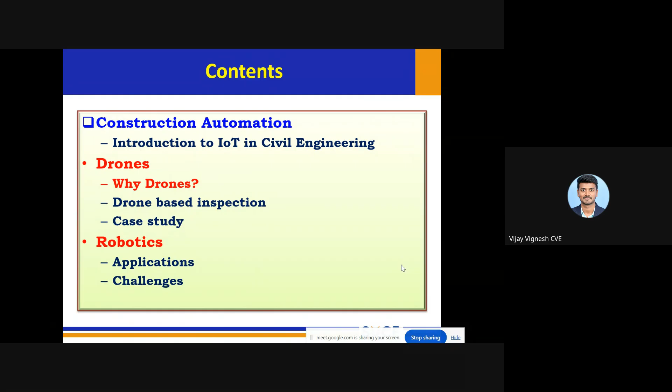When I say automation, first we need to know what is automation. Construction automation is the application of robotic systems, unmanned aerial vehicles (drones), intelligent machineries, sensor networks, and software tools to perform or assist tasks in the design, planning, fabrication, assembly, inspection, and operation phases of projects. So it's all put together.

Whether we use robotics or drones, whatever machinery we use makes the task simpler or leads to making it more effective. That's why we use automation, so that everything is automated and we won't have much human interference in building projects.

It can be any stage of the project - design, planning, fabrication, inspection, or operation. If it is automated, there will be much less involvement of manpower; manual labor will be significantly reduced. That's the main purpose of moving towards automation - to reduce manual labor and at the same time improve accuracy.

Accuracy means when I use robotics or machineries instead of manpower, the accuracy in performing the task will be higher - more accurate, whether it's brickwork, plastering, or lifting and transporting material. Anything done with the help of machinery will have more accuracy.

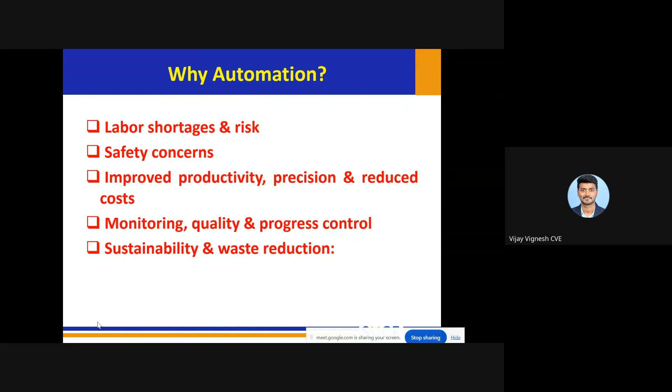The main reason is that, unlike other industries, in construction we are performing a unique task. The laborers are not performing the same task every day, because in the manufacturing industry, labor performs a task which is repetitive in nature - the same task day 1, day 2, day 3, day 4, every day. That's why we see that kind of trend there. But in construction, a mason performing a task today will not be performing the same task tomorrow, and day after tomorrow will perform some other task. Due to this reason, productivity keeps decreasing here.

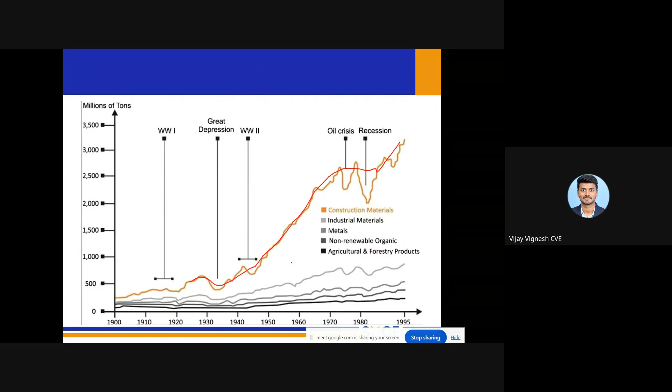So when I say wasted, it means it is not being used properly in our construction site. What is the solution? The ultimate solution would be to move towards automation. So when I say automation, the first thing we need to know is Internet of Things, IoT. IoT is nothing but a network of interconnected devices or objects embedded with sensors, software, and other technologies that enable them to collect, exchange, and act on data.

So when I say act on data, it means it can analyze on its own. It can analyze or evaluate the data. So whatever data it collects, it will exchange between the medium, and it will analyze, and it will give the output. So that is the main terminology for IoT.

So IoT definition just goes beyond smart gadgets. The examples would be like a smartphone, or computers, or a wide range of devices that we use in our household appliances, or any medical devices or vehicles.

Even today we are using ADAS in our cars, automatic driving system, something like that. It will automatically detect what objects are there, or what kind of vehicle is moving towards us, and it will automatically stop the vehicle. So that is one example we can see when I talk about IoT.

So for IoT, the main advantage is real-time data is being shared, and it will be communicated from one device to another device. These objects will talk to each other, meaning whatever device we incorporate in our system, these devices will talk to each other, and it will make informed decisions based on the data they collect, after analyzing it.

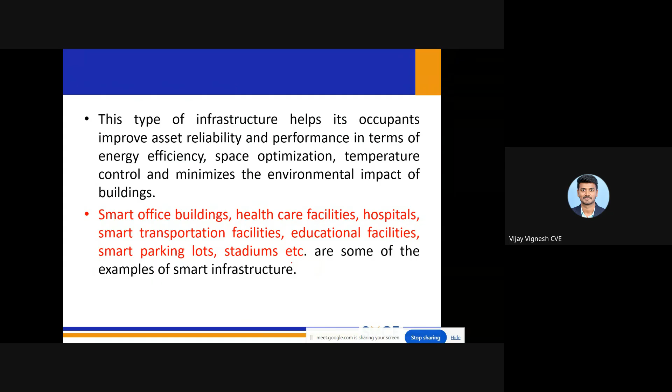So let me move on to the main aspect of this lecture, that is drones. The historical background and equipment - how we were using drones in the early stages.

In the past, there is a long history dating back to 1849, where soldiers were using unmanned balloons filled with explosives during the Austro-Italian War to attack Venice - a war between Austria and Italy. During the war they used large unmanned balloons to drop explosives from the night. That is the first instance where humans used drones.

In 1849. However, large scale use of drones began during World War One, and for a period after that, we were using drones only for the purpose of war and other related things.

In 1916, Britain developed the first aircraft drone, called the Ruston Proctor Aerial Target, followed in 1918 by the US Kettering Bug, an experimental aerial system with a flying bomb. These are things we need to know, because of the purpose for which drones came into place.

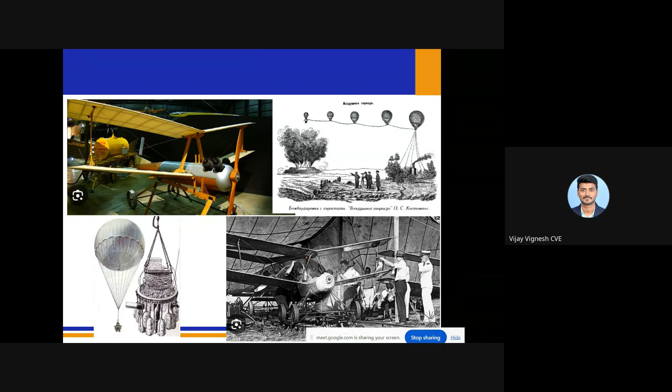The modern drone era began in the 1960s, with both the United States and the Soviet Union developing drones primarily for military purposes. While military applications have driven drone research for many years, drones have been used in today's various fields, for example agricultural, environmental monitoring, public safety, security, media, entertainment, etc. The use of drones in civil engineering, especially inspection, is significantly increasing.

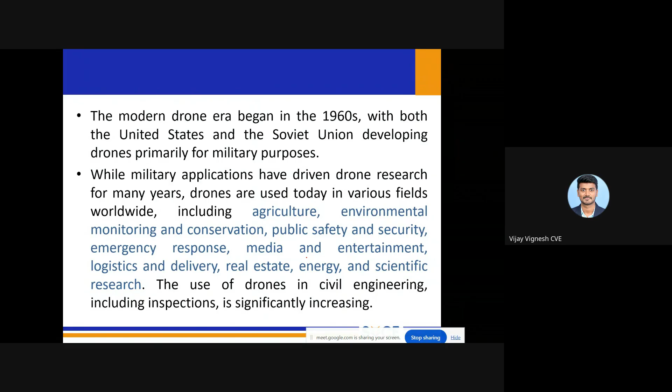This is the part where I'm going to describe in detail. There will be a number of applications, but in civil engineering, in modern construction projects, drones have been used predominantly for inspections - for any structural inspection or bridge inspections.

The existing problem is that traditional approaches based on contact sensing have some drawbacks. Usually, the traditional way is that humans go to the bridge or whatever structure we are going to inspect, collect the data, and analyze it there. It takes more time to analyze and more time to get the output.

So that is the main traditional approach we were doing in the early days. The problem here is the cost. The cost will be more. When I don't use drones and instead use manpower to collect the data, you will need a lot of manpower and you will be installing many other structures to collect all the data. So the cost of intensive instrumentation for the bridge can be very high.

When I say bridge monitoring, it is nothing but structural health monitoring, to detect any damages in the bridges. So those things will be collected using drones. Once the contact-type SHM is installed on the bridge, the components are often not reusable for other structures, and they are prone to fault. During extreme conditions, when critical structural health information is most needed, it is prone to giving faulty data.

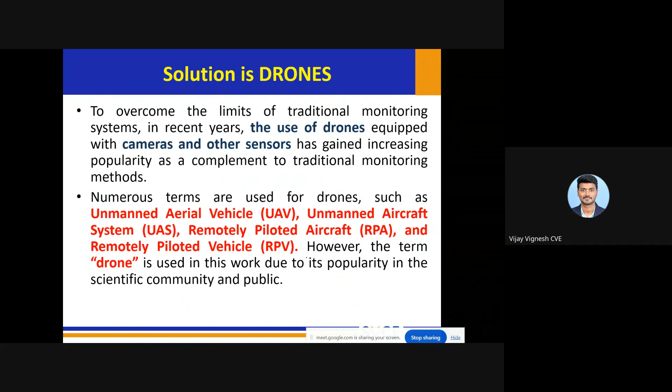Unmanned vehicles means vehicles without onboard operators. When I say unmanned, it means there won't be any man, there won't be any operator to operate it. It will be operated remotely from some other place. These vehicles are commonly controlled autonomously using onboard sensors and control systems.

Drone-based inspection offers several advantages. I'm just going to list a few. They provide a versatile and efficient means of data collection and monitoring, and perform detailed inspection, detect superficial damage, and even assess dynamic parameters.

When I say bridge inspection, it means structural health monitoring. That means we need to collect all the data from the bridge—we need to detect all the damages or dynamic parameters, what kind of vibration is going on, what the total moving load is. All that data should be gathered in a single platform.

So that data will be gathered in the drone, and the drone will process the data and transfer it to some other place in a cloud, where software will process it and we will get the output. Large amounts of information can be obtained from drone sensors, including high quality images and videos, which can be stored on memory cards inside the drone and later processed and delivered to the ground station deployed in the area of interest. This means everything we collect will be transferred to some other place.

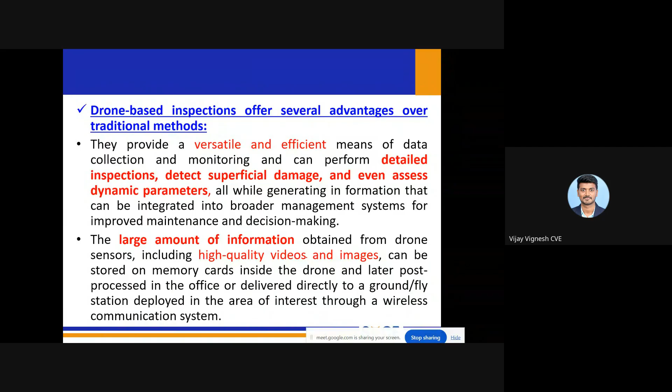That other place can be a deploy station where people will be present to analyze the data. Whatever data we need, we can get it from the deploy station. The main aspect is high quality images and videos—these are the things we are going to collect. In drones, we are just collecting images and videos; we capture those things, and after capturing, we analyze them.

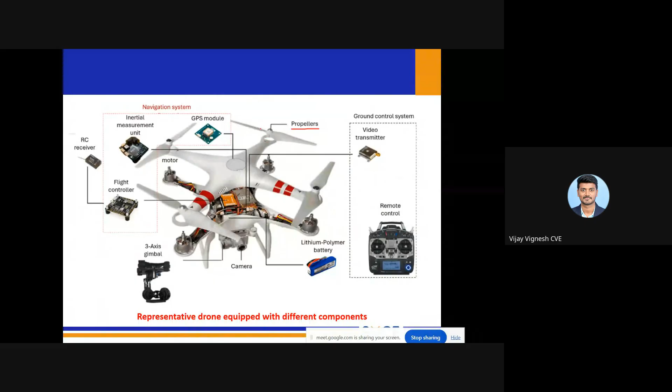The propulsion system consists of motors and propellers, with four or more motors providing the necessary thrust to lift and maneuver by varying their speeds, and propellers that generate lift and thrust, significantly influencing flight performance and efficiency. These four propellers play a vital role in lifting the drone, providing necessary thrust and adjusting speed, generating thrust which affects flight performance and efficiency.

So why am I saying all this? Because we cannot simply fly the drone and get the data—there are a lot of factors we need to consider. That is why I'm explaining all this. The communication system is the exchange of communication between the drone and the ground station; that is one component we have.

The navigation system includes the flight control unit, which processes sensor data, and we use GNSS, the global navigation satellite system, for locating data, enabling autonomous flight path and position hold. This means we need to check whether there is any obstacle in the environment. If there is any obstacle, we cannot simply fly the drone in that region—we need to see whether the obstacle will endanger the drone, or whether there is a possibility of changing the flight path.

The power system means the battery—the drone has to get its power from the battery, right? So the battery, power distribution board, and electronic speed controllers come under the power system. It runs on a battery; that is the main aspect we need to know.

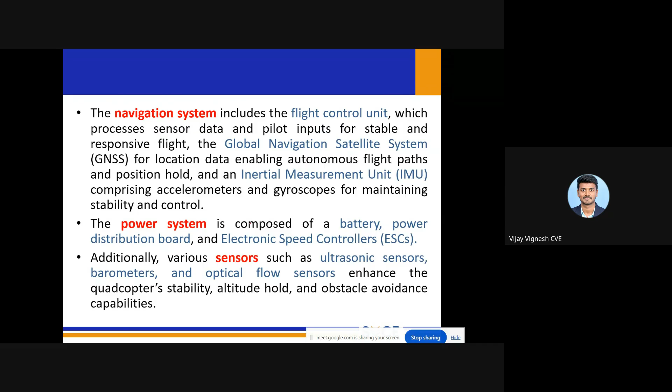Additionally, various sensors are used: barometers, optical flow sensors, ultrasonic sensors. These sensors collect the data. We need to take some data, right? Through these sensors, we collect and transfer the data. And some key devices we need to use in our drone are RGB image camera devices.

It is very much essential for drones to capture real digital images or videos, because it will capture the images through some resolution. There are some advanced models such as RGB-D sensors, which will enhance the capability by recording pixel depth and other information, which will support the 3D reconstruction of the infrastructure.

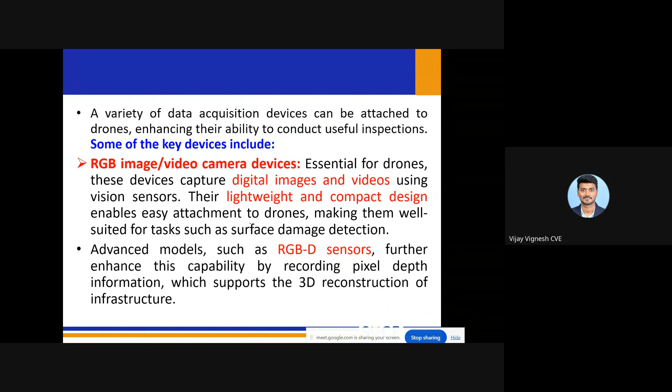The main purpose why we use this kind of RGB camera device is we will capture the images, and it will reconstruct that image in a 3D form. That is why we are capturing this kind of data through these devices.

So we have another device, LiDAR, that is light detection and ranging sensor. It will use laser pulse to measure the distance from single points with exceptional speed, often scanning thousands to millions of points per second. This rapid data collection allows the creation of detailed 3D point clouds.

When I say bridge monitoring, the main purpose is to find out whether there is any cracks or delamination, or any structural fault in our bridge structures. For this we can use LiDAR sensor, which will collect so much information and create 3D point clouds that reveal surface level cracks or delamination in our bridge.

Thermal sensor is used to detect any temperature surface variation. If there is any water leakage or insulation problems you want to find, we can use this kind of thermal sensor.

You can see these different sensors that we incorporate in our drones: camera, LiDAR sensor, and infrared sensor. NIR means near infrared sensor. It is costly and less commonly used, and it is a combination of both infrared and RGB sensor.

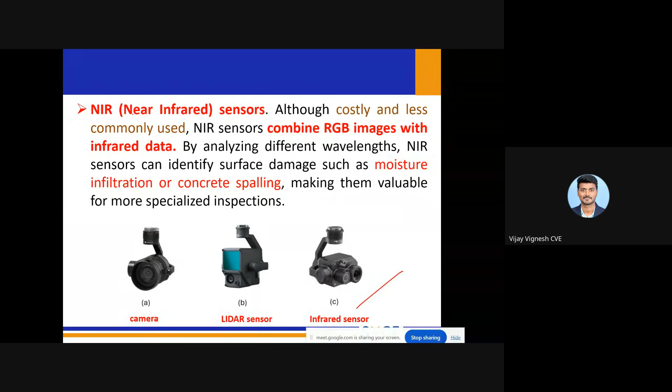Most probably when I want to find out whether there is any surface damage like moisture infiltration or surface level concrete spalling, we can use NIR sensor. So we can do many specialized inspections in our bridge structures. These are some important points we need to know while incorporating drones in our modern construction projects.

For example, weight of the drone - meaning self weight of the drone - plays a vital role which impacts the flight autonomy, because heavier drones can fly for less time. If the weight of the drone is increased, then there will be lesser time for the drone to capture the image. So simultaneously, lighter drones can extend the flight times.

If the drone is lighter, then we can use the drone for longer duration. The reason is it will reduce the risk of overheating issues also.

But the problem here is heavier drones can perform better in wind conditions. If there is heavy wind at a height of more than 50 or 100 meters, the effect of wind will be there. Under heavy wind or air pressure, heavier drones will give better performance than lighter drones. Lighter drones have some issues here - due to wind effect, they cannot give better performance.

The drones have to withstand at least a wind speed of 10 meters per second to minimize the vibration and sudden movement caused by air turbulence. There will be turbulence and vibration, and the drone needs at least certain capability to withstand it - that is what I'm saying, 10 meters per second.

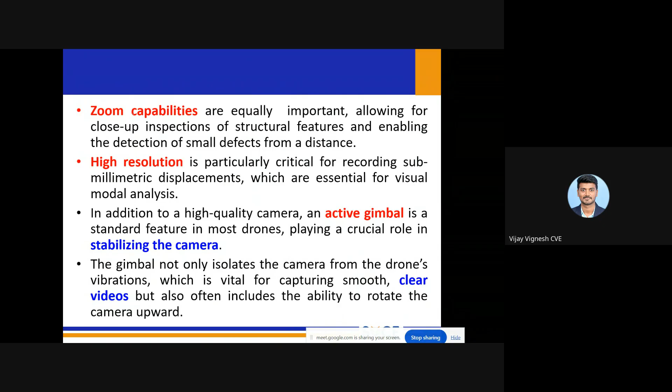That means that whenever there is any vibration or effect of wind, the gimbal will stabilize the camera and make sure it captures images properly. So the gimbal not only isolates the camera from the drone's vibration, but is also vital for capturing smooth, clear videos.

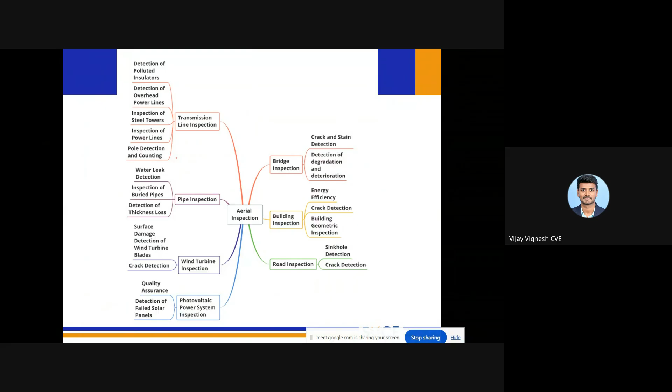But in this lecture, I'm going to concentrate more on bridge inspection - how bridge inspection can be carried out. The case study is inspection of bridges.

The main objective of doing this inspection is to find whether there is any structural fault or issue in our bridge structures - any cracks or surface level damages. So we need to find out the critical issue of the bridge, the current status of the bridge with respect to service.

For example, a visual inspection of bridge structure is to monitor the bridge status and ensure the ongoing serviceability of the structure - whether it is functioning properly or not. If not, then what is the problem behind it? Those things we need to find out using the drone.

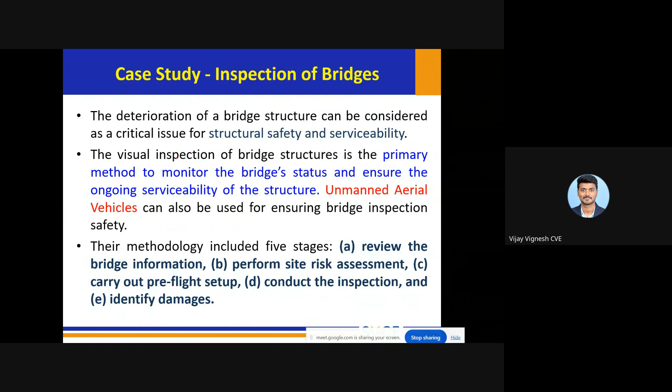So unmanned aerial vehicles can be used for ensuring bridge inspection safety. The drone will go into the bridge inspection place where it needs to be inspected, and it will collect all the data - images, videos - and send the data to some deployed station, and from there we will analyze and get the data. This is for inspection safety.

What are the different criteria? We go through different stages: pre-inspection, inspection, and post-inspection. In pre-inspection, before the actual inspection, we identify access points, areas like cracks, bridge components, and hazardous areas.

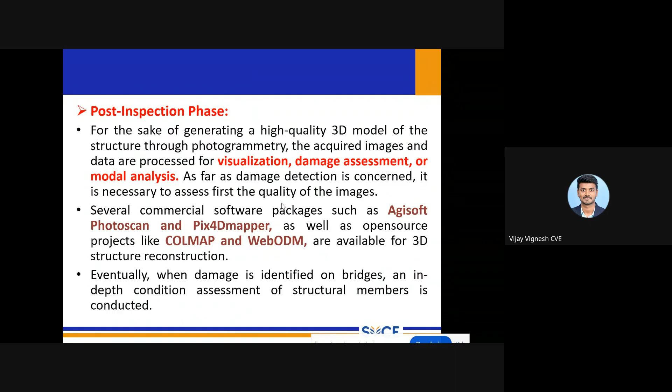Whatever image we capture, we can input into this software, and it will analyze and produce a 3D structure reconstruction, showing whether there is any defect, delamination, or surface level fault. Those things will be mapped in the software. Eventually, when damage is identified on the bridge, an in-depth condition assessment of the structural member is conducted.

Path planning and optimization is very important because there are few criteria we need to consider while doing flight operations, meaning flight duration of drones. The first thing is to identify the point of interest, the point at which it's going to capture the data. We need to plan an efficient traversal route for the drone to minimize overall flight time while maximizing battery life, spending lesser time while capturing more images.

When planning the flight path, several criteria must be addressed: ensuring collision-free flight, meaning it should not collide with objects or interfere with obstacles; achieving full coverage of the structure; obtaining images of sufficient quality; feature detection; minimizing the number of images; and devising an efficient flight route.

The method we are going to adopt here is the STIP method, meaning horizontal steps we create and capture using our flight path. For example, in a pier or a bridge, you can see a lot of lines drawn, each leading to a point called the point of interest. This means the drone will capture each and every point located here, planned so the drone captures images in a circular form. This method is called the STIP method.

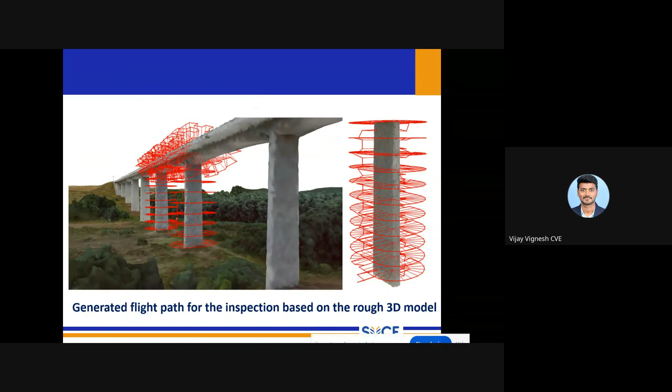These horizontal steps are more effective, particularly when combined with low flight speed. In this method, we deploy the flight at a lower speed, which means it captures data with high accuracy.

Another important factor is the optimal distance between the drone and the target. We need to make sure an optimal distance is maintained, usually around 1 meter or 1.5 meters depending on the situation. Under poor lighting conditions, 0.3 meter is required; under good lighting conditions, 1.1 meter is very much required.

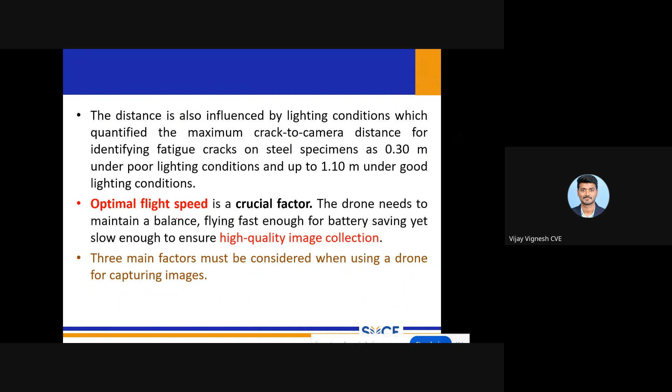Speed becomes important because it affects the balance of the drone. If it flies fast, it won't capture high quality images; only when flying slow at a lesser speed will it capture high quality images. Timing of the flight is also crucial because shadow, daylight, or solar radiation cause overexposure during image acquisition, affecting the output data. For example, collecting data at night results in lesser resolution and less detail in images. There is a standard time to collect data—for instance, in the evening there is lesser interference from solar radiation and shadow occlusion.

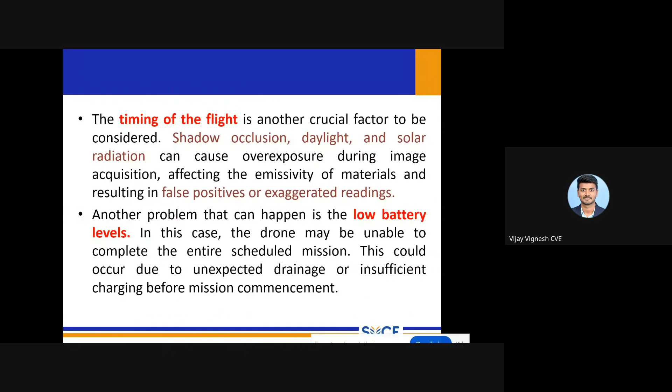Another main issue in drone inspection is low battery. Drones operate under a power or external battery source, so a drone will be unable to complete the entire mission or scheduled flight path if there is any battery issue, which could lead to unexpected drainage or insufficient charging before mission commencement. To overcome this, we need a specific threshold where battery level is continuously monitored during the mission. Whenever it reaches that threshold, the drone initiates return to its home point, the deploy station, so we must continuously monitor battery voltage and capacity.

Another aspect here is the Internet of Drones. This means we have different drones put together, interconnected, communicating with one another, acting as a single network. This is called the Internet of Drones.

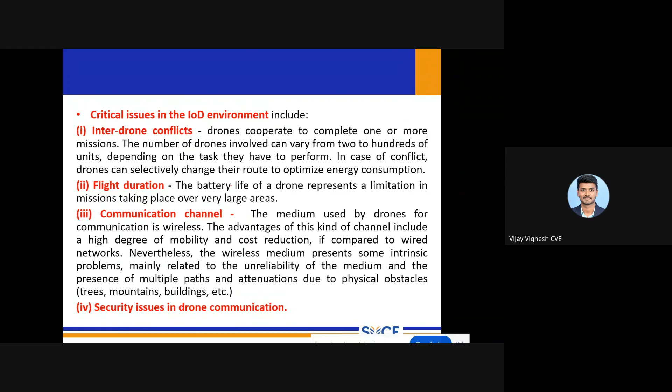Nowadays in rural areas we are still using wired medium, wired networks are being used. So mobility will be low, and security issues will be there. It can easily be hacked by some other person if they can access the data. So that is one issue we can have in this part.

How it can be employed in urban scenarios: it can be used for real-time monitoring like air quality, noise and rubbish detection. Also it can be adopted for traffic improvement, if there is any congestion, detection of accidents, road conditions, etc. Using this kind of Internet of Drones, we can identify those things and it can be deployed in urban settings.

Challenges: vibration becomes a more important issue. Vibration caused by external sources, vibration caused by maneuvers or aerodynamic sources like wind, stabilization system, or by the engine itself. Drones have propellers which rotate at some speed, and due to this propeller, vibration will come from the propeller itself, affecting flight performance.

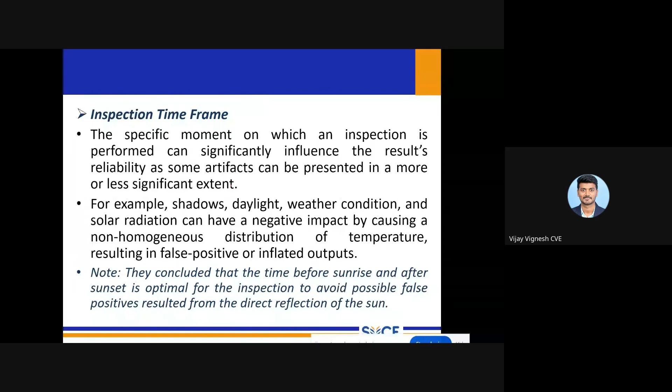These are things we need to check before going for drone-based inspection: the inspection time frame, when and where we are going, for example during shadow, daylight, or solar radiation, and during which time, for example sunset or sunrise. The solar radiation will have a negative impact on the images and give false positive output, so we need to avoid those things because of direct reflection of the sun.

If you collect data from that reflection and analyze it, you get false or poor data. The distance between the drone and the specimen is also important. Usually we need about 1 meter distance from the surface to ensure proper visibility for detection of small scale cracks in concrete structures.

Reflection is another consideration when doing drone-based inspection - we need to see whether there is an effect of reflection from surrounding objects on our surface. Due to surrounding objects' reflection, the drone will collect data with some sort of abnormalities, meaning there will be false data. This is a standard practice we follow whenever recording during drone-based inspection.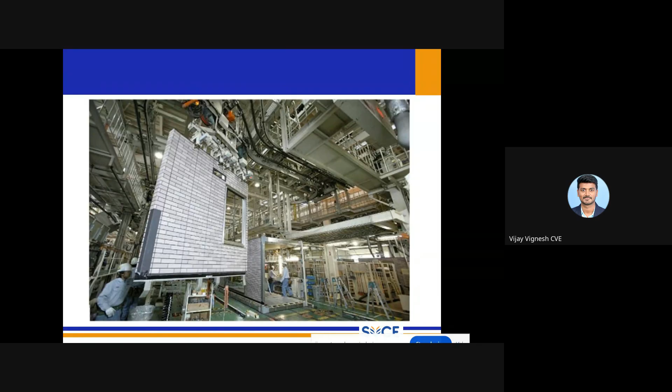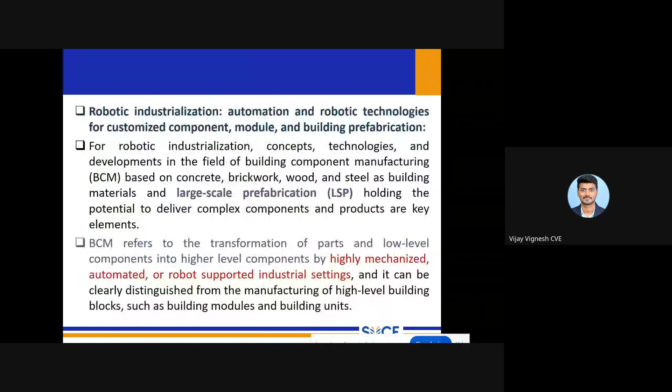Robot-oriented industrialization means much more effective large-scale prefabrication. For example, you can see here a whole building component has been constructed in our industry, everything done by the robot itself. Not just a single brick, I'm talking about the full wall - all the walls, doors, windows, everything fixed, and the whole building unit assembled in our closed environment, industry. It's being done by the robot. That's what I mean by robotic industrialization, customized to our user requirements, prefabricated but using robotics. So we are using large-scale prefabrication using robotic systems - highly mechanized, automated, and robot-supported industrial settings.

The next part where we can use robots is construction robots, elementary technologies, and single-task construction robots, where we use certain robots to execute specific construction tasks in a repetitive manner. For example, if we need to paint a building, we can use a robot specialized for painting. Suppose we're doing brickwork, then we can use a robot that can do brickwork. So for a specific, repetitive task, we can adopt such methods.

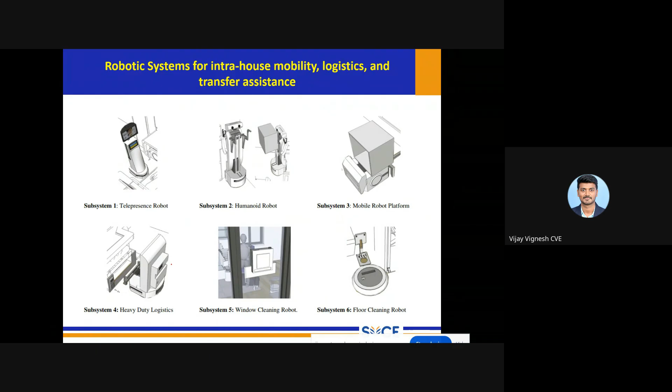These are some examples we can see: robotic systems for intra-house mobility and logistics. These are things we come across in day-to-day life, like heavy-duty logistics robots, floor cleaning robots, robot platforms, and telepresence robots - some examples we see at the airport. Window cleaning robots are also there, for high-rise buildings where we can deploy this kind of robot.

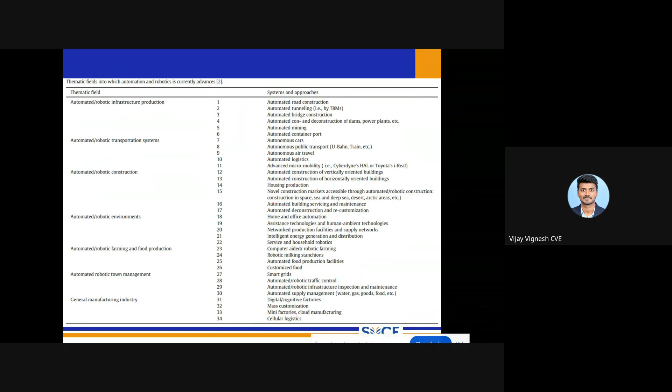These are different thematic fields into which automation and robotics currently advances - different areas where it's being used and is under research. For example, automated robotic environments, intelligent energy distribution, home and office automation, housing production, and automated mining. So automation has been incorporated into different sectors.

So in this robotics section, I'm going to explain more about a particular robot called the mobile construction robot. But before that, I'm going to explain what mobile manipulators are.

Mobile manipulators means a mechanical arm mounted on the skeleton of a mobile robot. It's just an arm mounted on the robot's skeleton, which enables the end effector to achieve desired motions through coordinated movements of both the skeletal base and the mechanical arm.

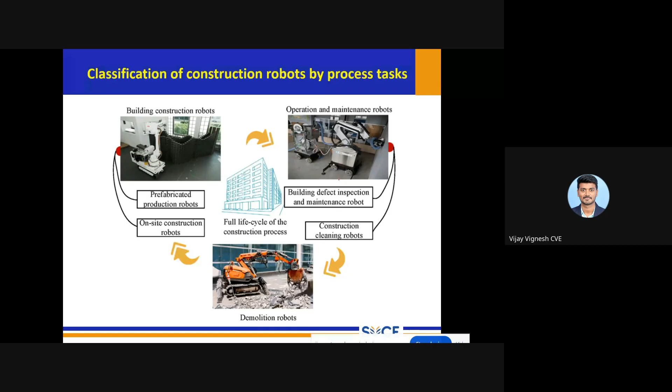Classification of robots by process task: for a building's full life cycle, we can deploy robots starting from construction, using prefabrication production robots or on-site robots. In demolition, we can use demolition robots to demolish building components. In operation and maintenance, we can have maintenance and cleaning robots. So robots are not only used for construction activity, but also for demolition, construction, operation, and maintenance, in every phase of the project.

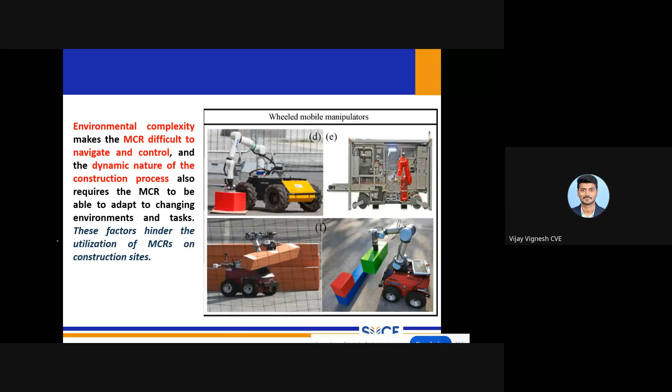The main issue here is environmental complexity, which makes MCR more difficult to navigate and control. Navigation becomes harder with environmental complexity, like any hindrance around the robot, since it's difficult to detect such hindrances. If there is any hindrance, we cannot navigate properly on our projects.

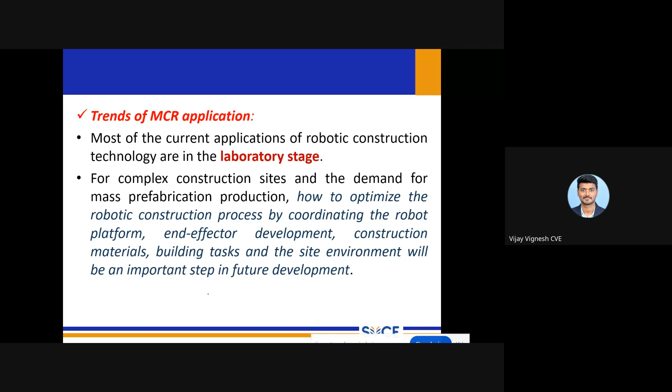In most cases, MCR applications are still at the laboratory stage, but in the future, they can be incorporated into prefabrication production or construction projects.

Okay, so this is how robots can be interacted in our building projects. We can simply say robots in future will completely eliminate the manpower, if at all we install or deploy it properly at our site.

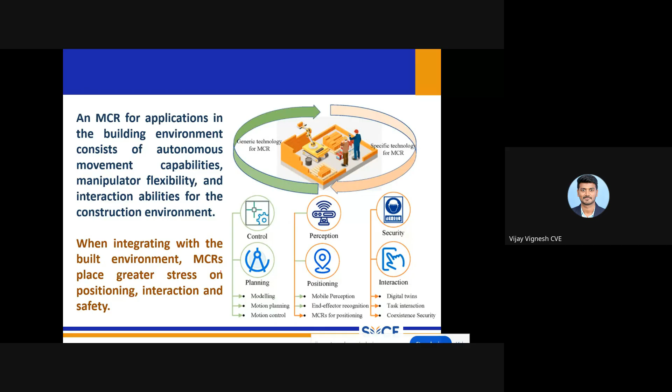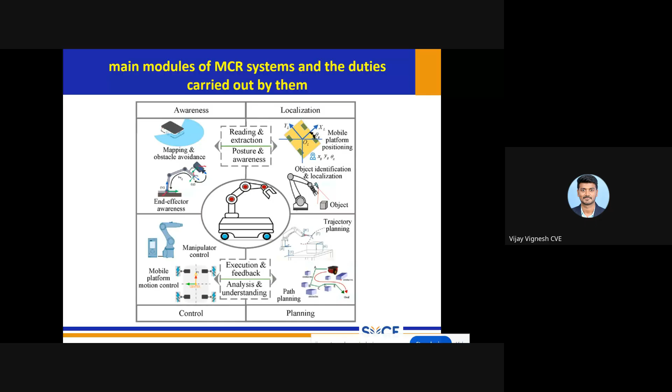Manipulator control means this part - control means motion control, how it's going to navigate in a project. Path planning means how it's going to plan the trajectory, for example how it's going to move from one point to another point.

Motion planning becomes more important in case of a construction site, because sound planning is very much required - every day we cannot say the same process will be carried out, the same activity will be carried out. Sometimes we have beam construction, beam concreting, the next day concrete, some other plastering work - so we have a dynamic nature of site, changing from day to day. So motion planning becomes more essential because it has to work in a complex scenario.

Environmental perception means how it's going to collect all the environmental data, like surrounding data using sensors such as lidar, camera, sonar, or GPS system. It will collect the data, map it, and construct its own map of the unknown environment. That process is called SLAM, simultaneous localization and mapping.

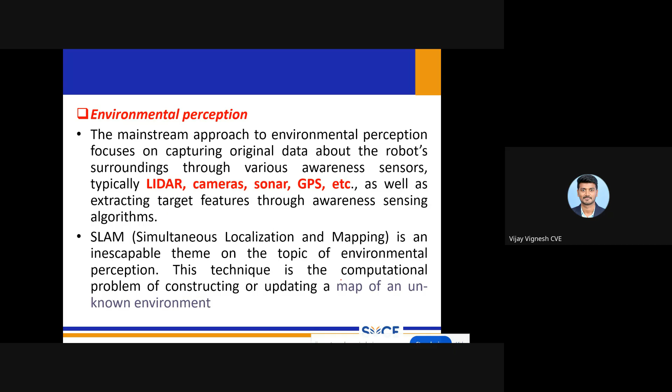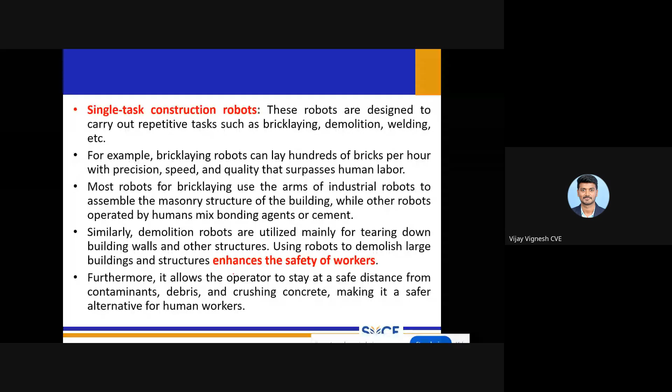Robot applications in construction projects - different applications are there, I'll quickly explain. Single task construction robots, for example bricklaying robots - if I'm going to lay bricks repetitively in my project, I can incorporate bricklaying robots in place of deploying manpower. This will directly enhance the safety of the workers also.

Multitask construction robots perform different tasks - from laser leveling, to bricklaying, to cutting, painting, plastering, reinforcement handling, and material handling. So different tasks are handled using this multitask construction robot.

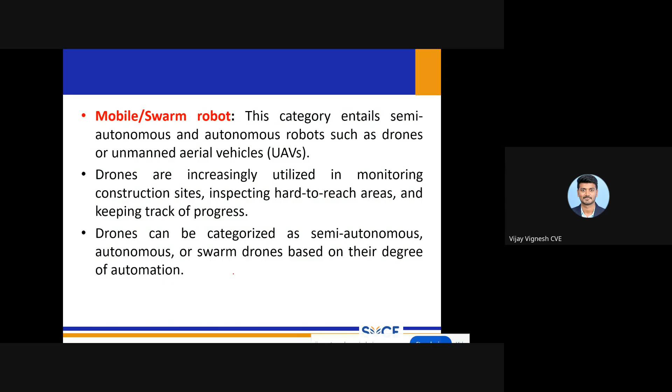Mobile or swarm robots means a category where a set of different drones or robots are interconnected and act together - that is called swarm drones. For example, swarm drones means 4 or 5 robots act together to perform a single task. That is called swarm robots.

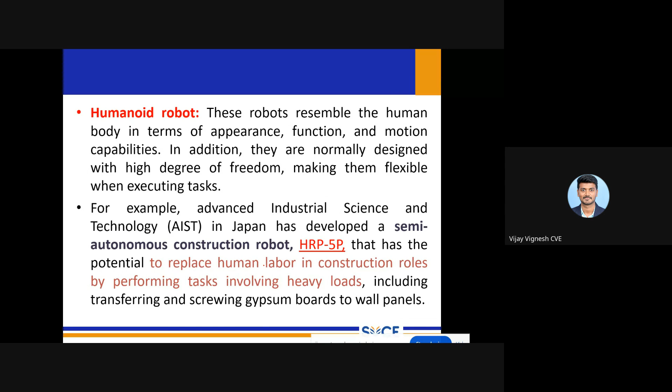Humanoid robot means it will resemble the human body in terms of appearance, function, and motion capabilities. They are normally designed with high degree of freedom, making them more flexible when executing tasks. For example, in Japan they developed a semi-autonomous construction robot, HRP-5P, which will replace human labor in construction by performing tasks involving heavy loads.

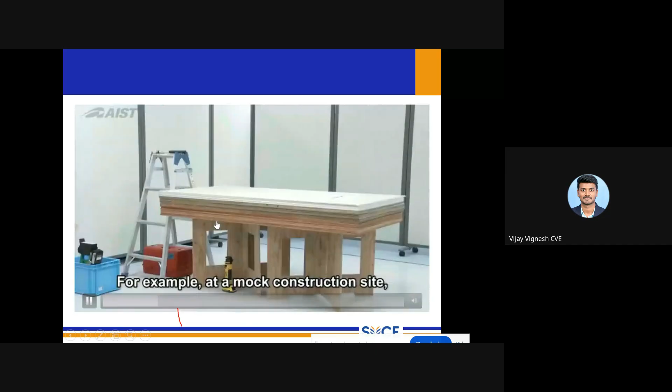I'm just showing a video here, you can check it out. You can see the robot handling big and heavy objects. They created an environment to check whether humans are able to lift, carry and do the job. Compared to humans, the robots have been lifting and handling the heavy materials effectively.

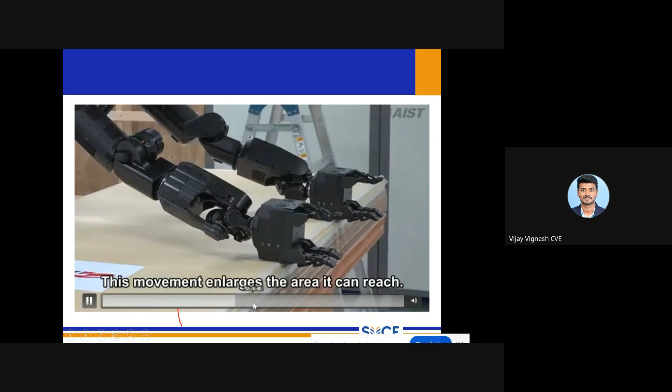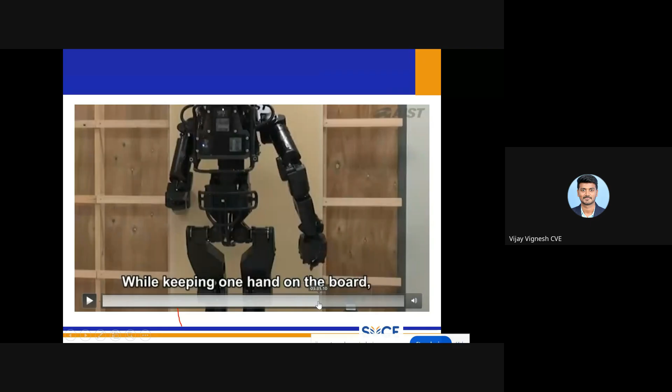So you can see here the robots are being used to lift the objects without any human interference. It creates its own environment, using SLAM, to create a map of the construction site. I'll move on to the next part.

Wearable robot is nothing but devices that we attach to humans to increase physical strength or endurance. It has been used for equipment tracking on construction machinery or tools. There are some applications that I'll quickly go through.

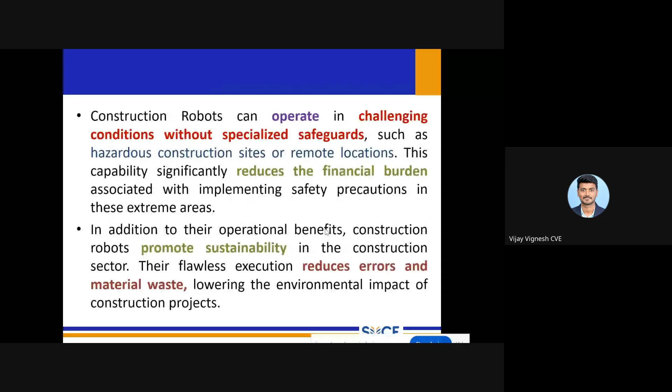For example, excavation. If there is no human to excavate, we incorporate certain software and data like lidar, camera, or GPS, so it fully understands the surroundings and navigates on its own, making sure there are no obstacles. It provides real-time 3D maps, and based on the map it creates, it will work.

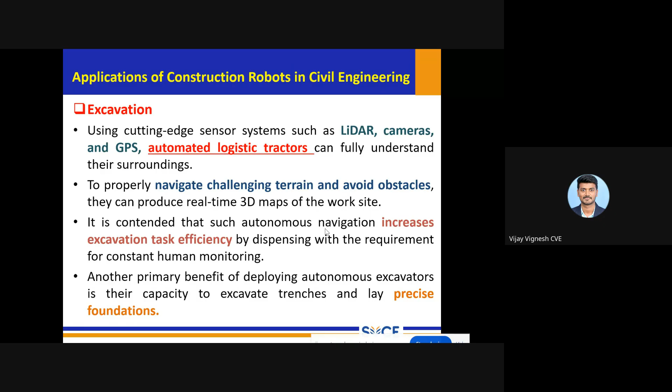We just need to give some instruction, and based on that instruction it will work on its own, but we don't need constant human monitoring. So this means we can complete the project at a faster rate and with enhanced safety for humans.

Concrete placement is another application, we also use robots for it. Using robots for concrete placement reduces concrete material wastage, lowers the cost, and contributes to a more eco-friendly construction process. These are some examples of concrete robots used in different countries like the US and China.

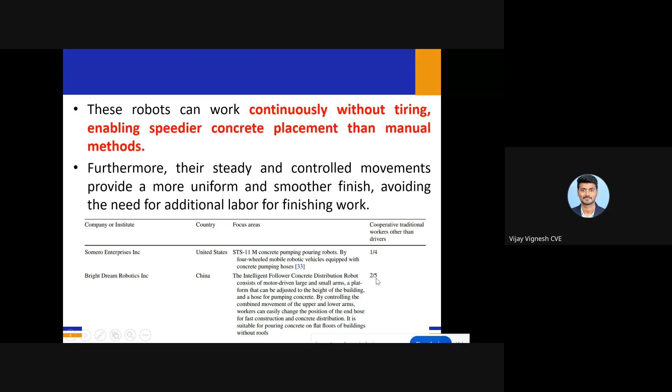China has been using an intelligent follower concrete distribution robot. In the last column you can see the number of workers used, only 2 laborers instead of 5 for the work. This means they are partially reducing the manpower while increasing the effectiveness of the operation. That's one example of concrete placement.

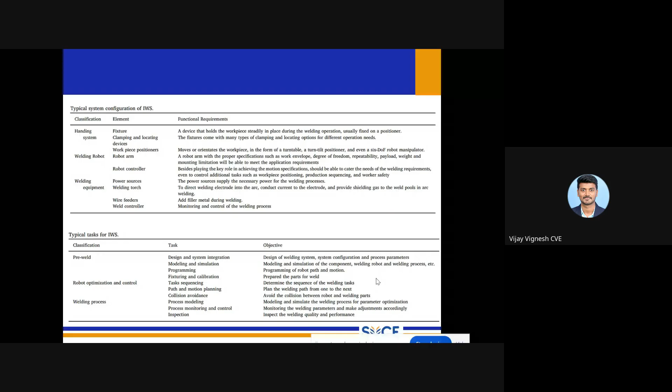Welding means we can also use robots for welding, robotic welding, for precise and efficient welding capabilities. These are different tasks we can go for, an intelligent welding system for handling the system, welding robot, welding equipment. When we go for welding, we have to make sure our objectives are satisfied.

Swarm robotic means many robots working together to complete a single particular task. That is called swarm robotics, and we can say swarm robots.

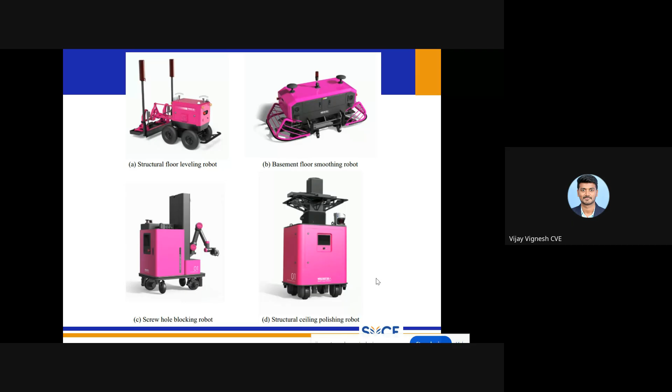These are some examples of different robots used on the construction site: floor leveling robots, blocking robots meaning screw blocking which we usually do in construction activity, basement floor smoothing robot, structural ceiling robot, mortar placement, tile robot, paint roller coating robot, and brick carrying robot.

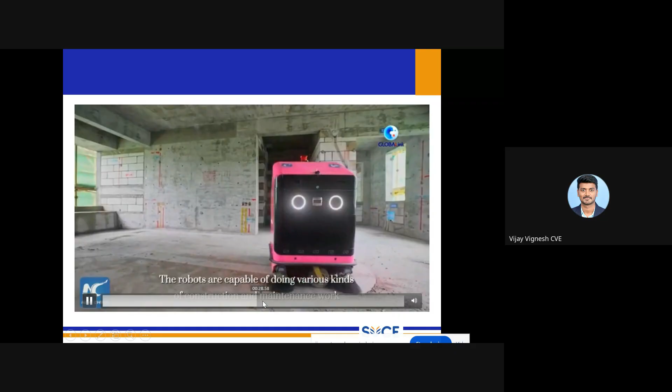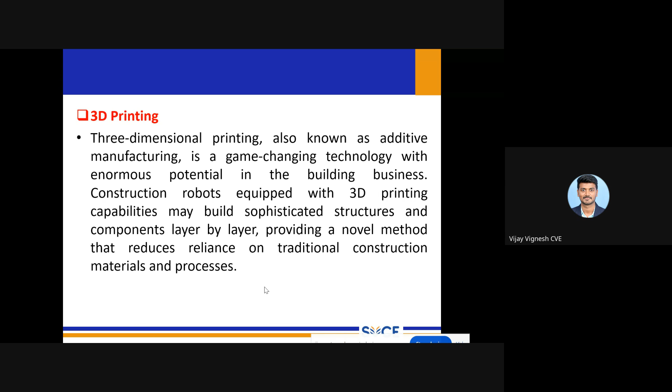So this is another example. Okay, due to time constraint I'm moving quickly. So 3D printing is also one area where robotics have been deployed. Even in India, larger applications have been used effectively in today's scenario. So 3D printing, you people already know about 3D printing.

Just moving to another part, that is pile driving. Even robots have been used in semi-autonomous piling machines to make sure pile driving is integrated with GPS. Using GPS enabled pile driving, we can drive the pile with greater accuracy. It's not just used for building projects alone; even in geotechnical engineering it is being used. Vibrations are continuously monitored using this kind of pile driving robot, and it consequently reduces the cost and enhances the safety of the workers.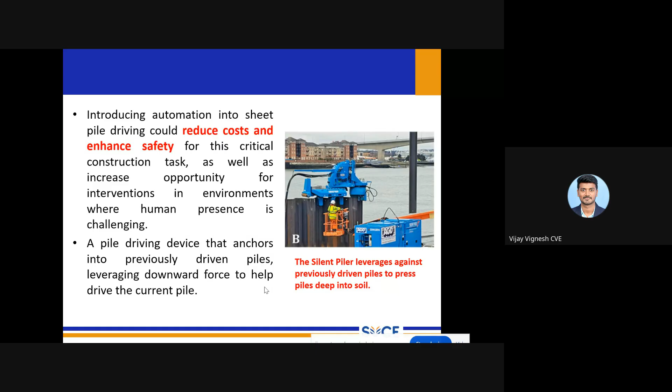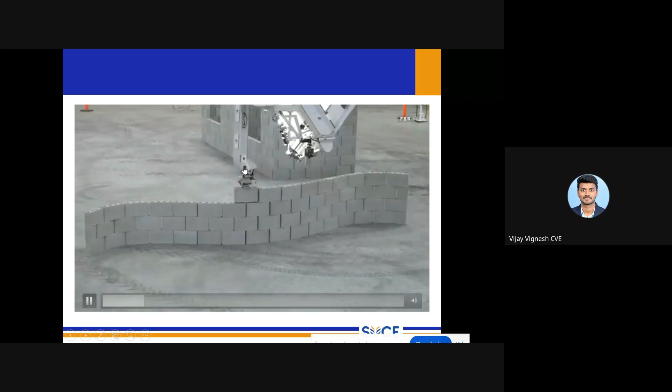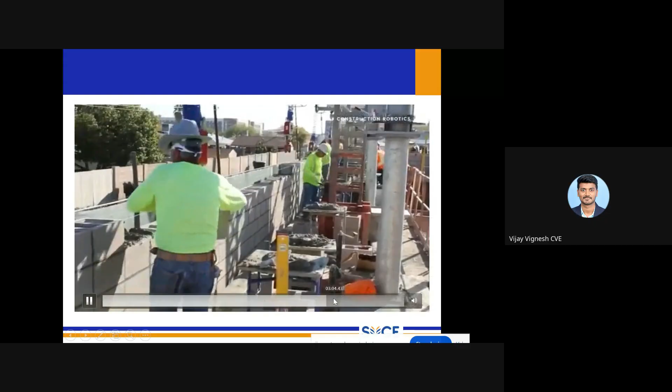Another example is structural assembly, where robots assemble every structural component in the building project. Let me show another video quickly. So you can see here, robots have been deployed for structural assembly. Only the finishing work is carried out by humans; other than that, everything is taken care of by robots.

This is done in the US. They have the Mule 135, which is used to lift and assist the laborers. It's a robotic arm used to carry materials and lift them to a designated place.

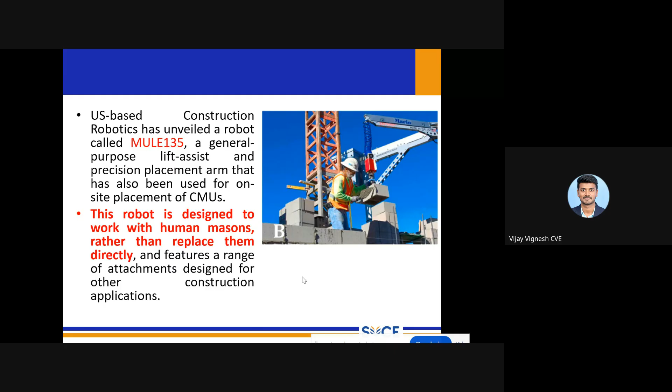This is another example of robots used in a rail gantry system for rebars, for rebar cutting or tying and welding operations. And for additive manufacturing, robots have been used, for example in 3D printing.

So this is another example. Just now I mentioned rebar cutting. You can see robots have been used for rebar cutting and tying.

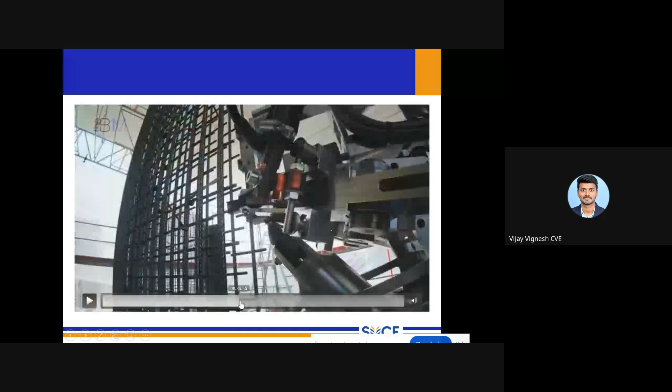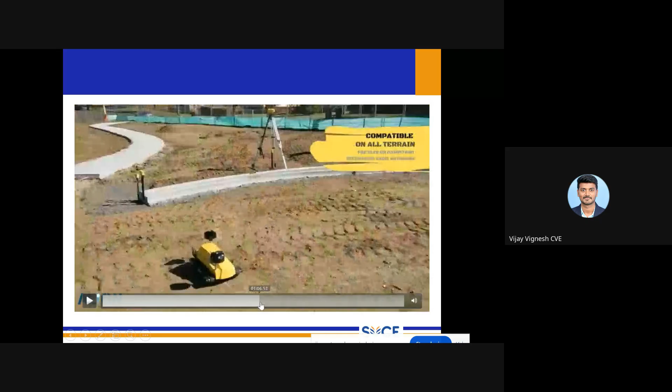Another example: this shows how robots can do the setting and marking of buildings. A robot will do all the marking, controlled remotely by a labor or engineer. Every plan itself is marked by the robot. After marking, the excavator will come and start doing its work.

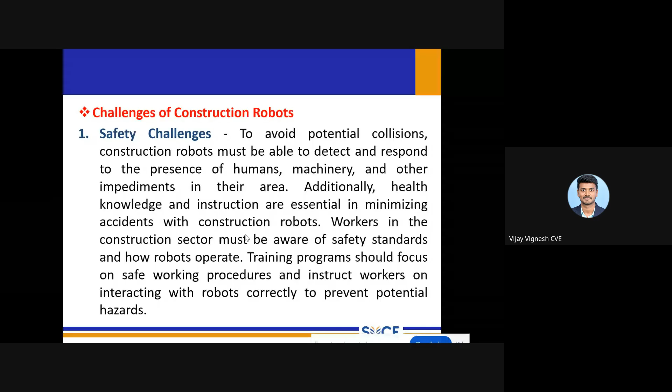The main challenge here is safety. We cannot just say safety might improve; additionally, the skill and knowledge should be there to operate the robot. If the skill and knowledge is not there, it will lead to accidents, because there will be human as well as robotic interaction. So we need to incorporate proper training for the laborers working in a built environment to prevent any potential safety hazard.

So these are some standards we can incorporate for human-robot collaboration. The adaptability and flexibility challenge means the robot has to adapt to the challenging, dynamic nature of the project. Different activities in building projects have different challenges, and the robotics has to be flexible enough to adapt to those, with proper perception, decision-making algorithms, and versatility to perform different tasks.

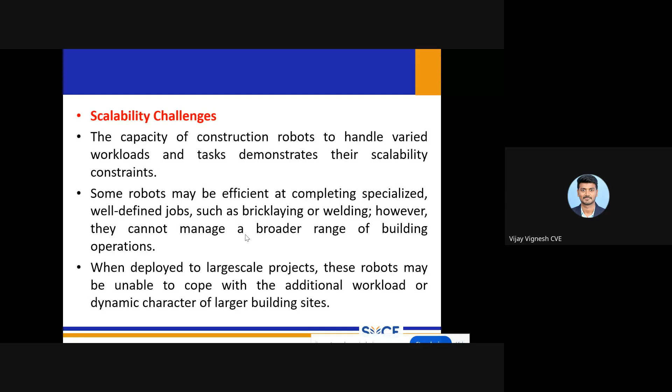The scalability challenge means it has to handle various workloads and tasks. It can't only lift a certain capacity; it has to have some limit or threshold, but also do a variety of jobs in the project. Only then can we deploy it for large scale projects; otherwise we can't deploy it for small scale work and expect profit.

So here's a scenario, an example where robots have been used. Whenever robots are used in building projects, for a particular task, the manpower required is reduced in the physical environment. For transporting, moving, or any kind of work, laborers might have lesser productivity, or due to external factors spend less time or take more time to handle things.

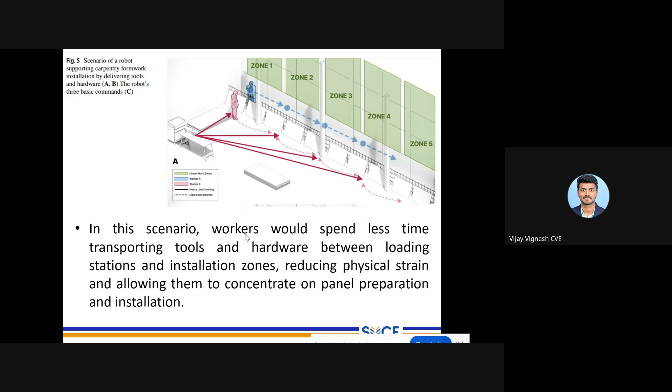So when you replace labor with robots, we get better productivity and performance. You can see here the robot performing different tasks like summoning, accompanying, and sending, all monitored by a human. That is one part, but all the different operations are carried out by the robot itself.

So that is one part I'm going to discuss. Whenever we use robots, there is an algorithm called RL, reinforcement learning. It's a machine learning method suitable for systems operating in dynamic environments. When we incorporate the RL algorithm, it means the robot gradually refines a decision-making strategy or policy in real time by learning from its own interaction with an environment.

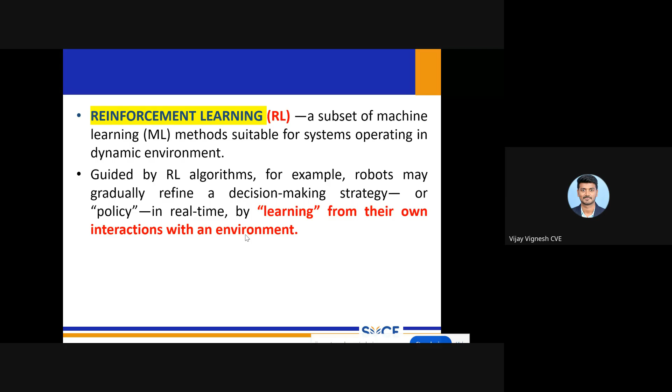So it creates its own environment, its own interaction. For example, I put the robot in a certain project and I monitor it. The robot learns its own way and develops its own algorithm. If a robot finds difficulty in movement, we find a solution and put that as an input to the robot, then the next day the robot overcomes those issues because it's learning. That's why it's called a reinforcement learning algorithm.

For example, you can see here they have created a simulation, putting the robot in a place with obstacles in the project. They monitored whether the robot is learning in its own way. It's proven that the robot senses all the objects and creates its own path. After some duration, if the same obstacle comes across, the robot will automatically detect it and create another path, building its own environment.

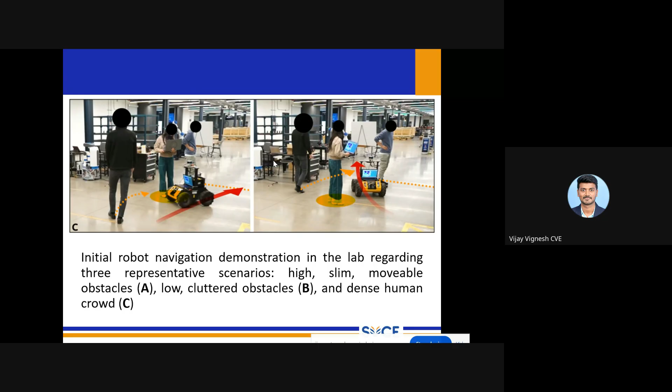So, initial navigation demonstration with slim and movable obstacles. They have created a simulation with different capabilities. After the simulation, they found that the robot is performing and creating its own map. This type of simulation is called a sandbox environment.

Last, let me close it up with an economic comparison. Some of you might think, if I use a robot, what is the cost? Because the robot's initial cost will be higher, so eventually I'll be spending more money on my project. So what is the purpose of using this robot? I'm showing some comparison of why we need to adopt robots.